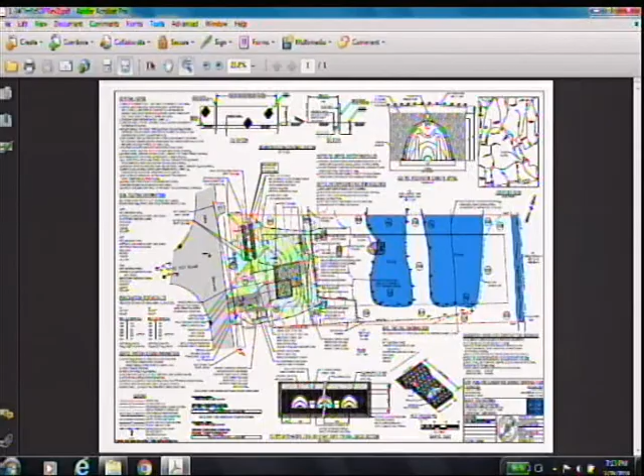So we have submitted revised plans and a letter dated March 20th, 2018, to Mr. Scott Schatzline in response to the review comments on his memo regarding the project here at 94 Elm Street. We also submitted a report from Eric Davison providing some additional information on the invasive species on the site, as well as several alternatives that he discussed in his memo regarding the invasive species.

So the changes we made to the plans and the additional information we provided included bringing the survey up to date so that it was T2 certified, putting the contours on a NAVD 88 datum. We added the limit of the floodplain to the site plan, which was based on the field topography. Property owners to the north have been added to the plan, and a note has been added to the plan indicating that the wetland flagging was located as part of the survey.

Let's see. We provided a response on the owner's request to maintain the current location of the existing gazebo, utility building, and deck overhanging the westerly pond. Those are all shown on the site plan. The gazebo and the little utility building are in this location here. And this is the existing deck that's overhanging the pond. If you want to call it the finished floor of that deck, it is above the floodplain elevation, which is approximately 409, this line right here.

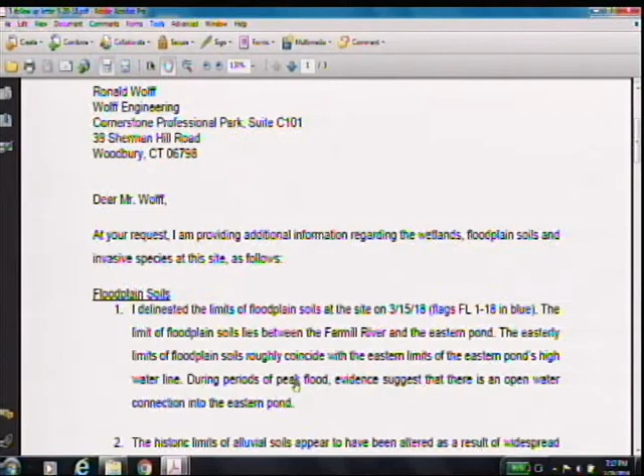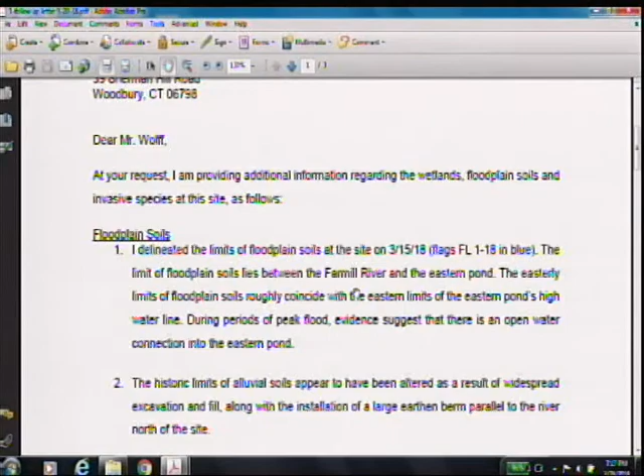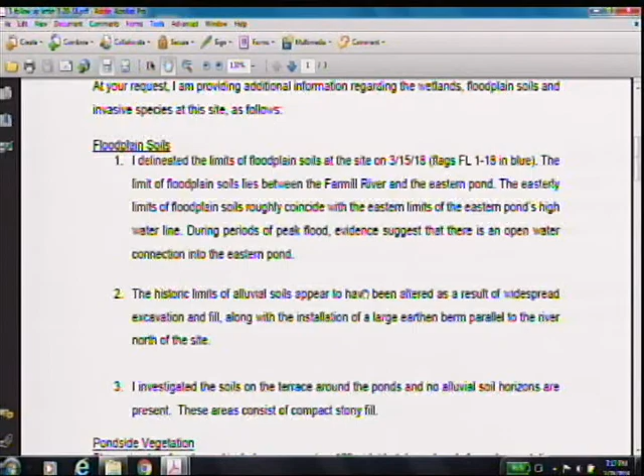Eric also delineated the floodplain soils, which was kind of difficult for him to do, but he did it by soil borings. He found the floodplain soils to be located more to the east, near the actual boundary of the river, but there was a lot of disturbance there, obviously, from the ponds.

Let's see, he discusses the vegetation along the ponds, the different species. Invasive plants, I think that was the item of concern to the commission. Invasive plants are not widespread on the site. The largest concentration totals approximately 1,500 square feet and is located along the northeast corner of the easterly pond near the Farmill River. See attached sketch. This area includes multiflora rose, Japanese knotweed, Japanese barberry, Asiatic bittersweet, and bush honeysuckle.

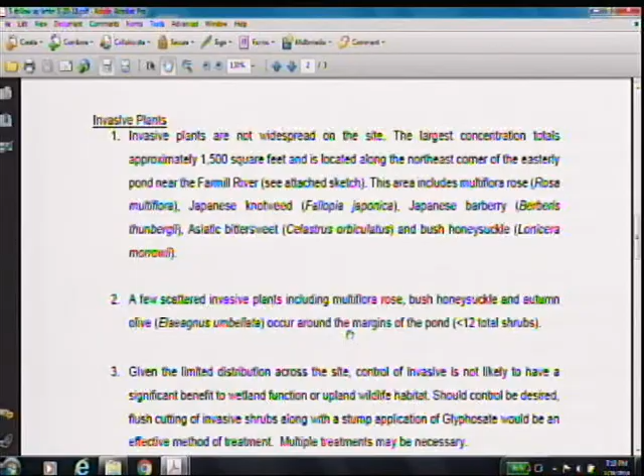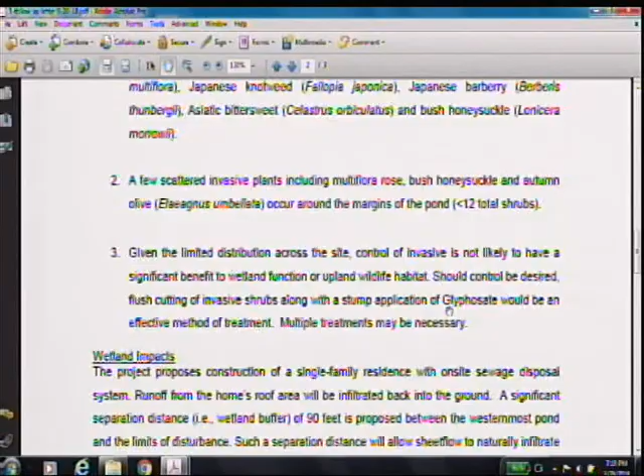A few scattered invasive plants, including multiflora rose, bush honeysuckle, and autumn olive, occur around the margins of the pond, about less than 12 total shrubs. Given the limited distribution across the site, control of invasives is not likely to have a significant benefit to wetland function or upland wildlife habitat. Should control be desired, flush cutting of invasive shrubs along with stump application of glyphosate would be an effective method of treatment. Multiple treatments may be necessary.

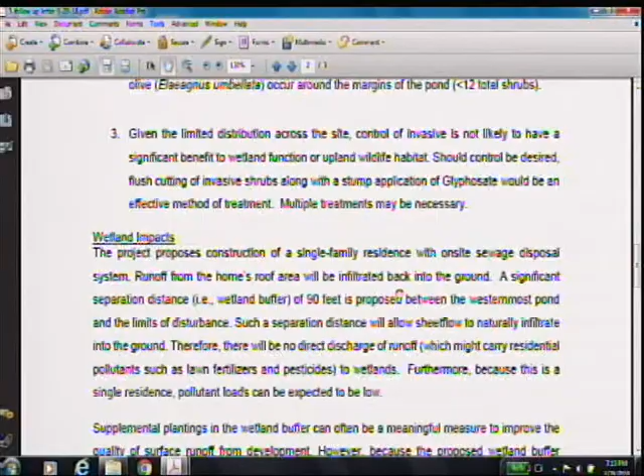So we kind of wanted to have a discussion with the commission about that, and that was also noted for discussion during the hearing on the updated memorandum from Mr. Schatzline. Regarding the wetland impacts, Eric writes: the project proposes construction of a single-family residence with an on-site sewage disposal system.

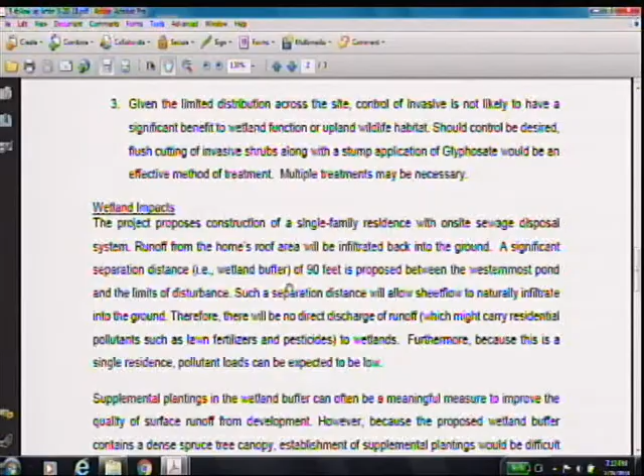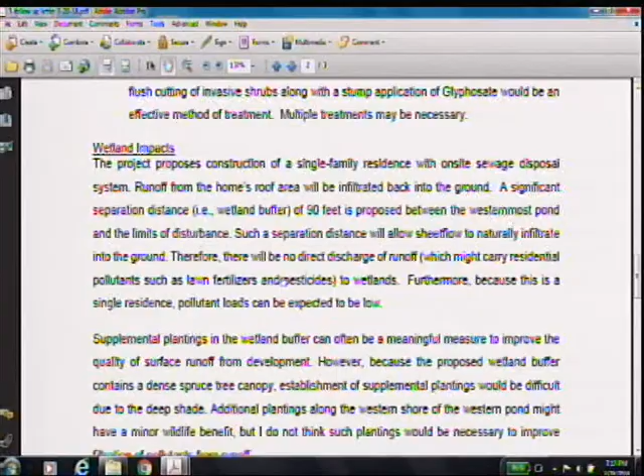Runoff from the home's roof area will be infiltrated back into the ground. A significant separation distance, i.e. wetland buffer of 90 feet, is proposed between the westernmost pond and the limits of disturbance. Such a separation distance will allow sheet flow to naturally infiltrate into the ground. Therefore, there will be no direct discharge of runoff, which might carry residential pollutants such as lawn fertilizers and pesticides to wetlands. Furthermore, because this is a single residence, pollutant loads can be expected to be low.

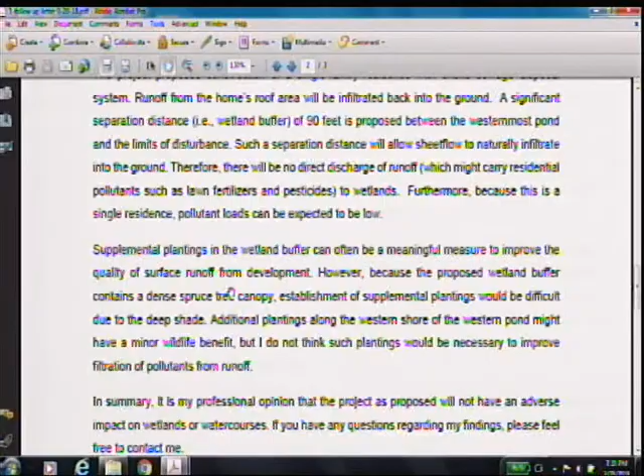Supplemental plantings in the wetland buffer can often be a meaningful measure to improve the quality of surface runoff from development. However, because the proposed wetland buffer contains a dense spruce tree canopy, establishment of supplemental plantings would be difficult due to the deep shade. Additional plantings along the western shore of the western pond might have a minor wildlife benefit, but I do not think such plantings would be necessary to improve filtration of pollutants from runoff.

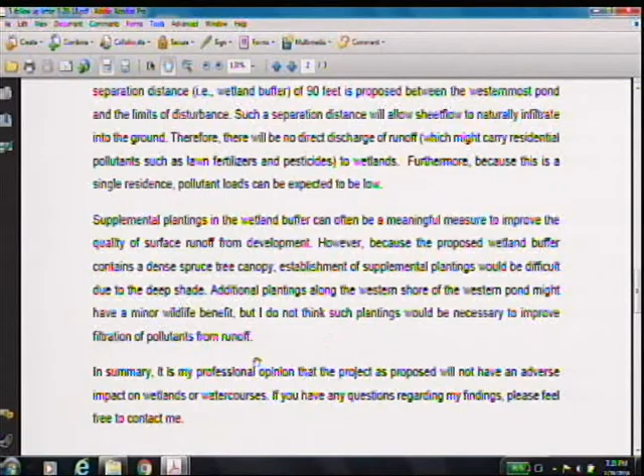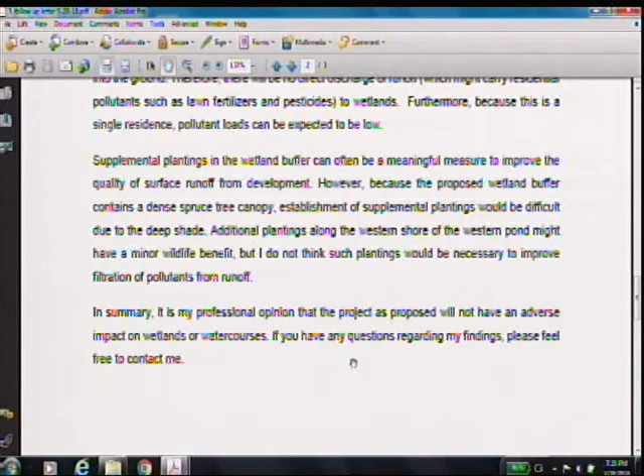In summary, it is my professional opinion that the project as proposed will not have an adverse impact on wetlands or watercourses. If you have any questions regarding my findings, please feel free to contact me. That's Eric Davis.

And he just has attached a sketch showing approximate locations of the invasive species with some notes. And that is all the updated information I have. I can answer any questions at this time.

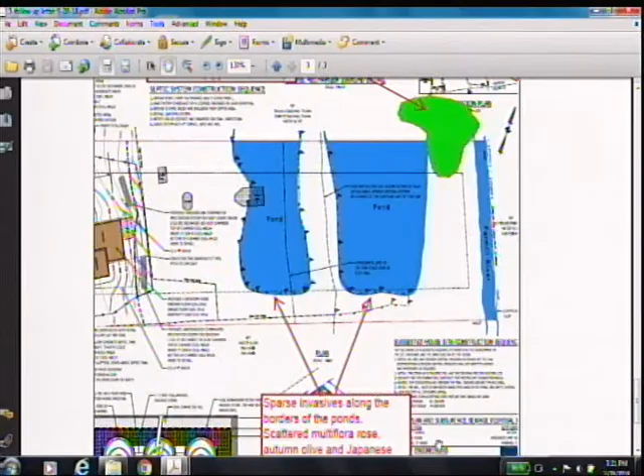Couple questions. Sure. So I noticed on the new plan you put apparently soil types, with the numbers, but there's no legend, there's no indication of what those are. At least I couldn't find them anywhere. I saw the soil boundary line, but I went through both this report and his delineation report, and there's no numbers associated with the soils.

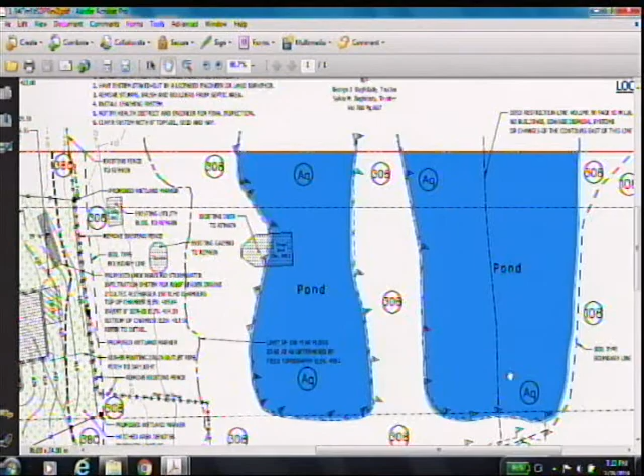Eric did provide an email for me, so I believe the 38C is the Hinckley type soils. The Aquents is the pond, so that's the AQ. They don't use AQ anymore, but it's a number, it's a number that they use. But I guess the critique is that in order for the rest of the commission to understand what these are and what description it is, having it on a legend and indicating what we're looking at would help, because we can't go back to any of the reports to understand what that is.

Okay, I understand what it is, but just a critique that we can't go back anywhere in any information to understand what that is. And in his report, he mentions floodplain soils, but he doesn't specifically talk about what soil it is. Is he just indicating that it's the Saco soil, or is he indicating something else? It's just a little general—he talks about alluvial soils, talks about floodplain soils, and if he's indicating that they're the same, it'd be good to have one consistent term used. Okay.

In terms of the invasives, one other thing we talked about last time was tree line, existing and proposed. The site's pretty forested right now, so it's a matter of what are you proposing, and where is that new tree line going to end?

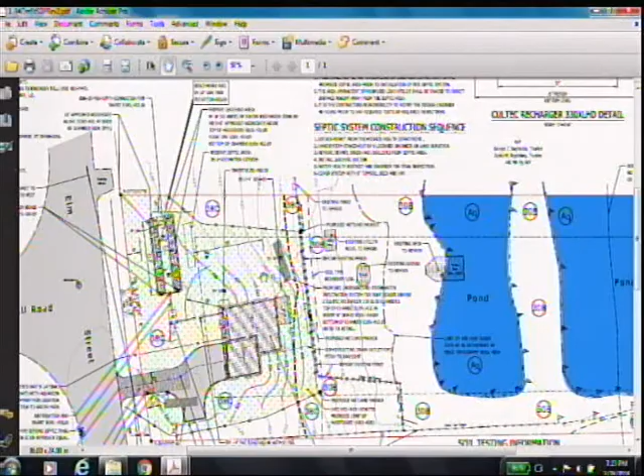I've shown that pretty clearly—this green area is our area of disturbance. That's going to be the proposed lawn, and the remaining vegetation everywhere outside of this clearing area is proposed to remain. It's pretty heavily wooded.

If I can get some clarification, because this was a little confusing for me too. When I went out there, this whole area in the back was previously cleared—it looked like an outing type place, with a gazebo, an outdoor kitchen, a three-sided shelter, and a deck. There are larger trees there, and it looked like it was cleared and maintained a bit better.

So when I look at this, I see a yard here that goes with the house, the lawn, and I understand the desire is to have the lawn go to here, which is good. But my question was exactly what do they intend to do here. Usually in locating these markers, what the commission does is put them at the limit of future maintenance and disturbance.

Whatever area these people are going to use for their yard, whether it be wood chips or green grass, now's the time to set those appropriately, because I'm assuming they'll want to go back there and use part of that to get to the deck and all that.

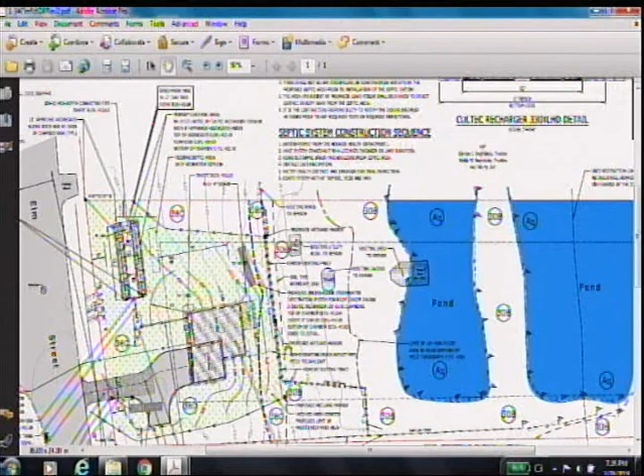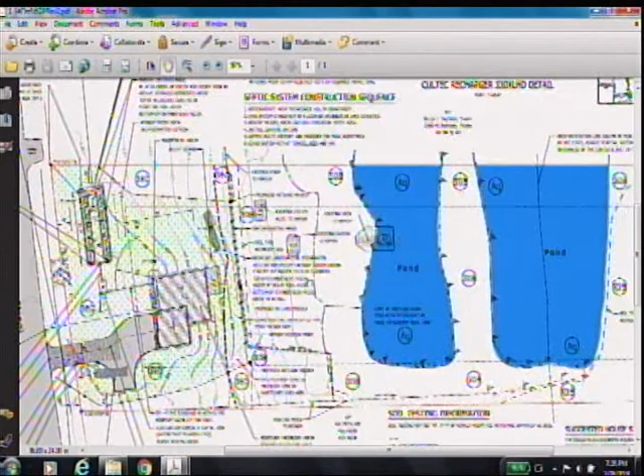It's been our experience at times that if you don't give a large enough yard to start with, new people who move in want a bigger yard, so they flatten everything and end up creating a violation because they're not aware they need our approval to do work in the upland review. Would it behoove you to make a little bit bigger yard so they wouldn't feel the need to expand what they have? He's very—

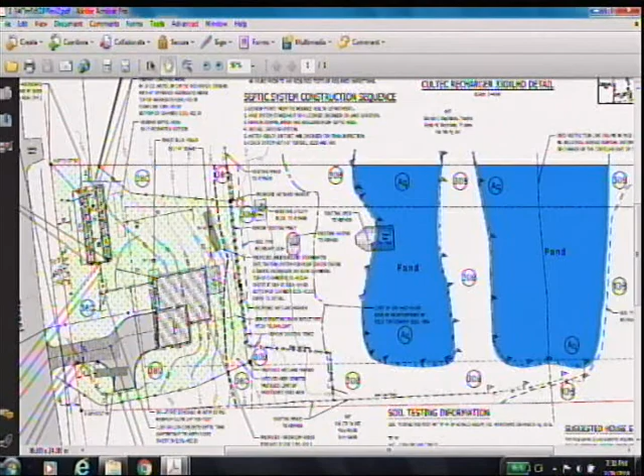I love the trees, they're gorgeous. Let me see - did I miss, are we happy with where the markers are in this? I know Scott had mentioned it. But if we're removing the fence, and now it's just the markers into the wooded, pine, whatever barren area there - is that the appropriate spot for those markers? Should that be at the grade change, do you think? Stupid question.

What do the markers say? Does it say wetland area, or regulated area? Yeah, they're kind of ambiguous because they're used for different things, and typically they've been put in at the limit of, within the upland review area, at the limit of what they're going to maintain.

Now, in this case, it's your choice. They could either go there, or I was thinking they could go along the other side of this thing, about 10 feet away from the pond here, and then coming in this fashion. We're open to whatever the commission suggests, essentially.

We could have a condition on it that kind of qualifies what this back area within the 100-foot upland review, in other words, what it should remain as unless they come in for an additional application. That's what I was thinking, but you could do it either way. I just wanted them to know that now's the time to discuss that. We're open to suggestions on that.

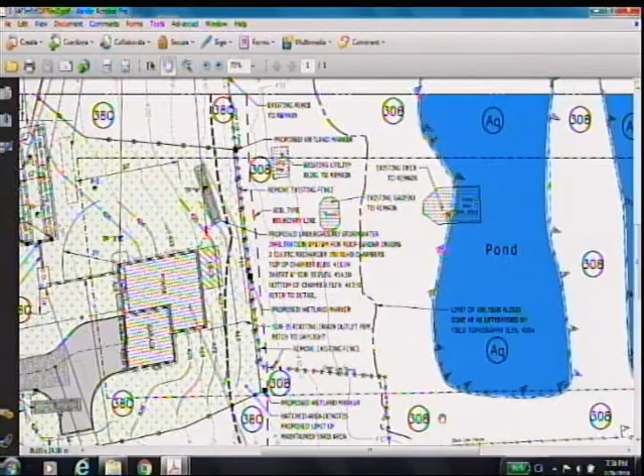But I do have a little bit more information on the soil types. Maybe I should have put that on the plan. I didn't know how much information to add, but Eric Davison just provided me that there were Saco-type soils along the river. Is that the number 108? That would be the number 108, yes. Okay. And then the ponds were the aquents. I'm not sure how you pronounce that. AQ were the two ponds.

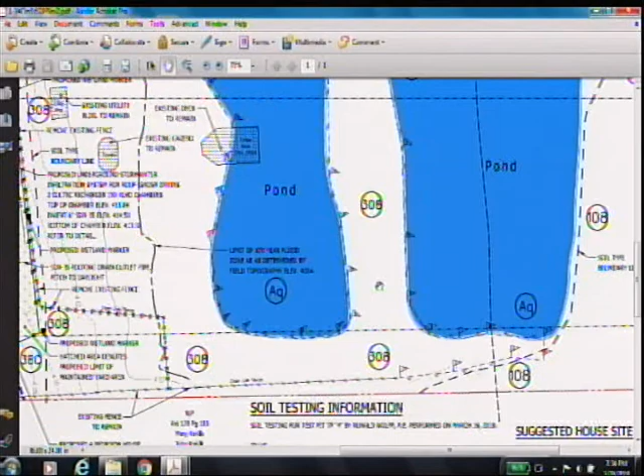Low slope east to the floodplain were udorthents. I believe is that 308? I used to see those as UD. So these numbers are kind of new to me, and I actually asked him for the letters. He told me they don't use the letters anymore, so they're using the numbers now. And then the Hinckley is the 38, and the C represents the slope on the land. If that helps at all.

As far as the markers go, they have their lawn area, but it's a pre-existing use area, and it almost makes sense maybe to do a 10-foot buffer off the edge of the pond. That's what I was thinking. I wouldn't even do that funnel, just do it off the edge of the pond. I think that makes a little bit more sense. And you could request that they put a note on the approved plan, and have it in a letter, that that area remain non-seeded, that it remain as is unless they come in for a future application. You put that qualification statement.

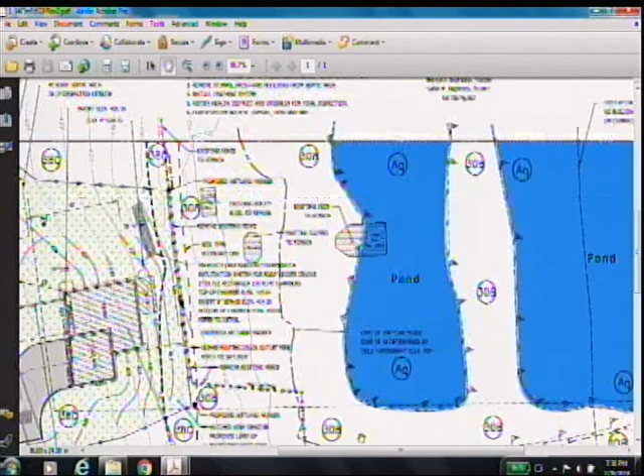So we could draw a straight line 10 feet off the westerlymost edge of the pond, put two markers on each property line, the north and south, so you have a straight demarcation. That might simplify things. And maybe one in the middle, or two at quarter points. I guess I don't understand: we don't want them, once they buy the house, to cut all the trees down, and if we put the markers 10 feet off the pond, I would think I'm set to do anything I want until 10 feet off the pond. Well, that's what I'm saying, have the qualification statement in the letter. Yeah, but they're not going to remember that. Who would remember, you don't even remember the marker in front of you.

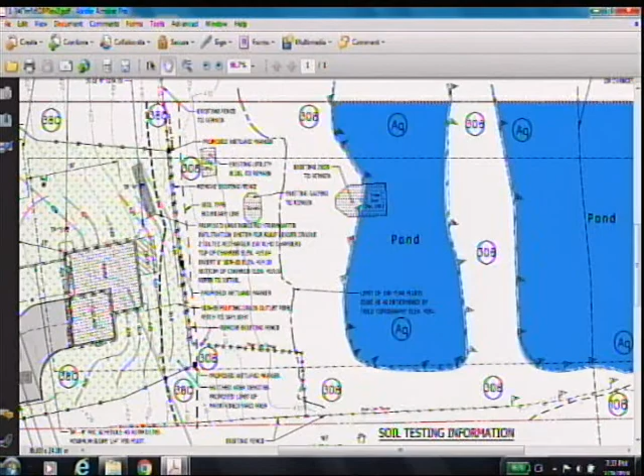Well, wouldn't it be a good idea to recommend that they stay out of the flood zone? Because that to me would be the demarcating line. The flood zone is more of a sensitive area, you don't want future owners to... I mean, flood zones can easily be utilized for passive uses. You still can use it even with the markers there, you just can't put structures there. Right, well, at least it alerts people that there is something special about that line, and with the conservation markers up there, it might say, okay, that's my drop dead line. That was just a suggestion.

Just leave it as proposed at this point. Yeah, I suggest leaving it as proposed then. That's where the limit is, that's where they're saying they won't disturb any of those trees at the edge of the developed areas. If they want to do more, they can come back. The marker doesn't mean you can't walk through the pine barren to get to the pond, it just means you can't cut the trees down.

Yeah, I'd rather leave it. It doesn't say you can't use the property. Good point. Yeah, that's a good point. I mean, in this case, the markers could just go where they're showing them, and then just leave it. If they were to do anything notably within that area, they'd have to come in for an application. Agreed. I guess that's why we left the wording kind of general. Well, it is in the setback area, right? Yeah, it is. Yep. Anything else from the commission?

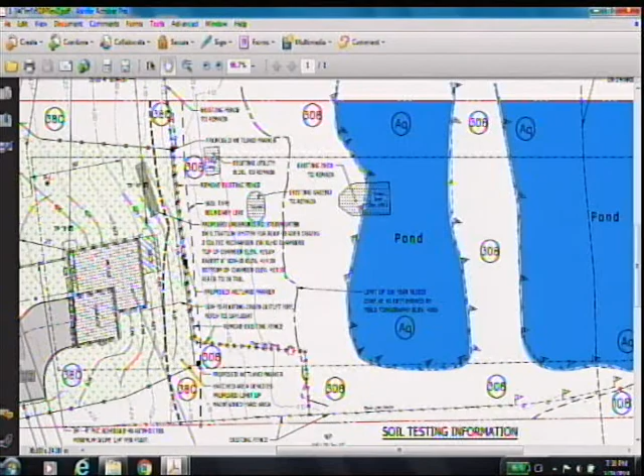The only other question I had was about the easement. Did we discover whether it is or is not an issue? The deed restriction? Well, what I did was I looked into it, and I mean, it clearly is an infraction against the deed restriction. The way I kind of put it to bed, because I really don't know what to do with it, it's so old, if you were to reverse it, what are you gonna do at this point?

But what I did was I went through the state statute, and if you read it carefully, it says that they have to provide the notice to the holder of the conservation easement if the proposed activity is within the easement area. And it's not. Now, what we've done, and I think we should continue to do, is if there is a conservation easement on the property, we go through the motions of that notice, and I haven't gotten anybody that has had an issue with that. But in this case, when I read it carefully, technically it doesn't say that, so I was just disregarding it.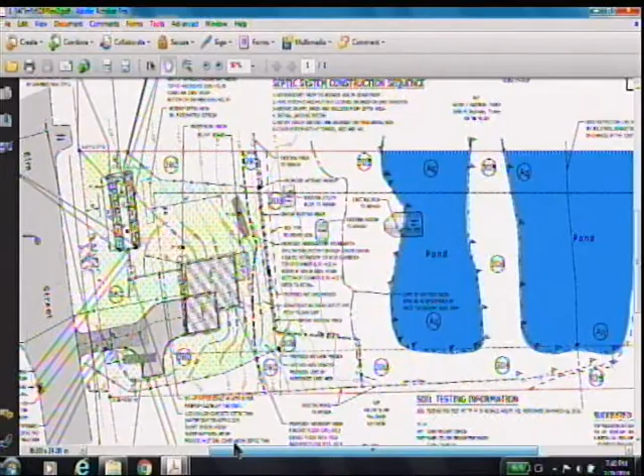Okay, all right. Similar to that is the floodplain issue and the fact that there's a deck there. When I went through the GIS program that we have, and went all the way back to 1984, there was evidence of that deck or some appendage out into the pond there, within a year and a half of when the floodplain regulations were adopted from FEMA. So again, without having real accurate information, I just let it be. Okay. It is a very solid deck, and it is above the floodplain elevation. I think that was probably a guess.

So what I did was I put a note of it in the file, addressing both as to how you rationalize that, and it is labeled as exhibit number 11. Okay, good. That's it, I have no more questions. Anything else from the commission? Okay, I'm assuming I've gotta do public comment, right?

Seeing as though this is a public hearing, I will open up this hearing to public comment. Is there anybody here that wants to speak in favor of this application? Seeing none. Anybody want to speak in opposition to this application? Anybody want to make a comment of a general nature on this application? Seeing none, I'm assuming we want to close the hearing, correct? Yeah. Okay, so we'll consider this hearing closed. Thank you very much. Appreciate your time.

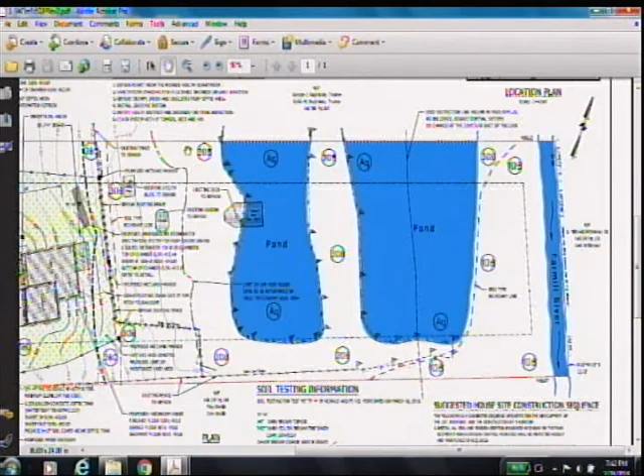Thank you. When do we hear the verdict? We will deliberate as soon as we're done with a few other things, and we'll get a letter out to you, right? Well, you typically would be voting the following meeting, remember? Two weeks. Just take a copy and forward it to the desk. Two weeks, is that our next meeting? Yeah. Is that a statute requirement? No, that's just typically how the commission does it, so that they have a draft from a legal standpoint. He composes the letter and we read it. You don't have to do that if it's a simple application, but we found that it's much more legally sound and cleaner. Gotcha. Thanks, Thomas.

Holding on to me over there, Lois, making me sweat it out. Thought I smelled sugar in here.

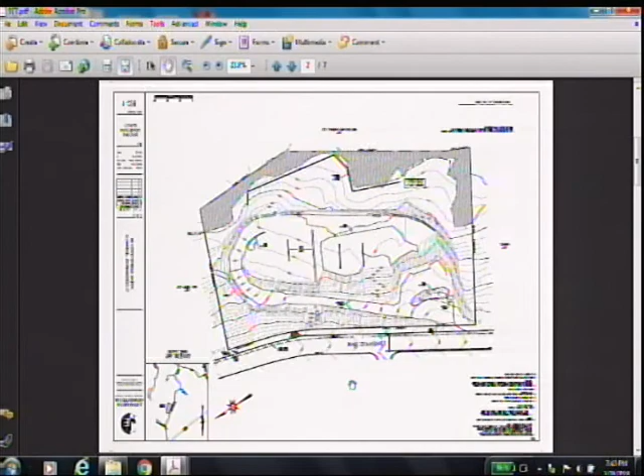Everybody ready to move on to the next item on our agenda? IWC 2018-01-R, 98 Enterprise Drive. Excuse me. Enterprise Drive LLC, Bartoli partner, Edwards engineer, site development to construct building and storage area and remediation of IWC 2017-02, continued from our last meeting on March the 14th.

Good evening. For the record, Larry Edwards, professional engineer, offices 27 Stepney Road in Easton. I basically have 10 items here that I picked up from the last public hearing that required responses. We provided revised plans to the town yesterday, and so I'm just going to go over those quickly. And Scott did send back a response letter to us yesterday or today with, I think, 2 or 3 other items that we didn't address, which I would hope they can make as conditions of any decision they make. But I'm just going to go through the ones here.

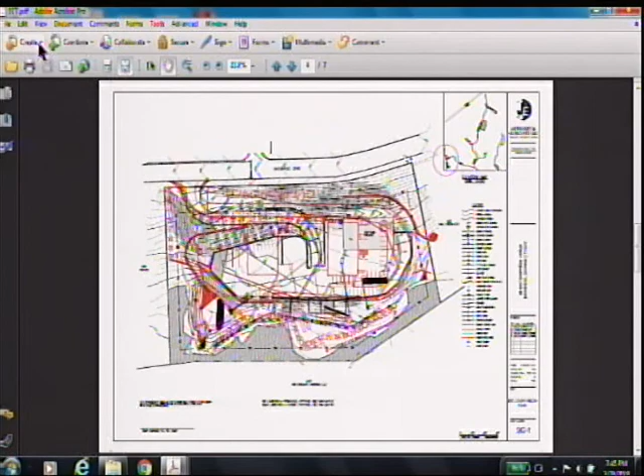There was an issue of, this is the comparison plan, and we had the before and after plantings locations in the same color, whereas they should have been red for the previous application. And one of Scott's comments was, and this plan doesn't show it, we didn't include this little bulk area, which was an existing previous application item that should have been red on this plan. So we do have one additional thing that we missed that was under Scott's comments. Now going to the site drawing.

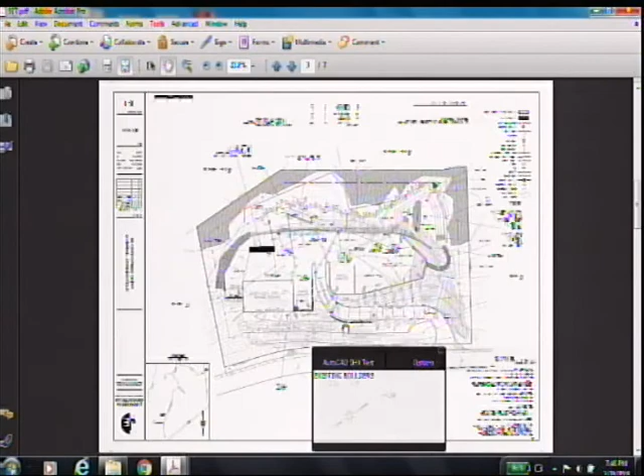You gotta get off the drawing, I think you gotta go over to some of the white area there. There you go. There we go. Just trying to get it rotated one more time. Just up beside that one.

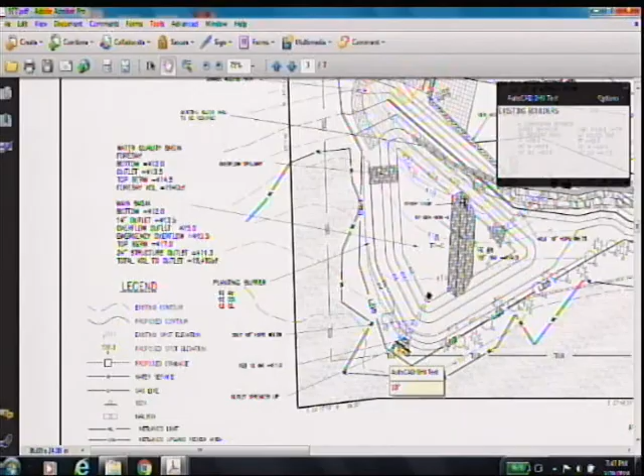Just going to go through the items. The first item that I have on my list, and these might not be in any specific order, there was a comment brought up about the size of the riprap outlet pad that we had. We revised that to, actually, as Scott had recommended, a spreader lip. We were able to reduce the length of that considerably, and a detail of that is provided in the plan. The existing stone walls, there was this stone wall that goes around along the edge of the wetlands, which we didn't show. We have included that on the plan.

The plantings, it was requested that we look at staggering the plantings, and we have done that here. Basically we kept the evergreens, which are, I believe in this case, spruces, as a constant line, but we staggered the intermittent plantings so that we get the effect of a staggering, but the delineation will still be a straight line with the evergreens. An access ramp to the basin, we proposed that. We've shown that here, and it's graded to a grade that we can get into the site and get into the basin.

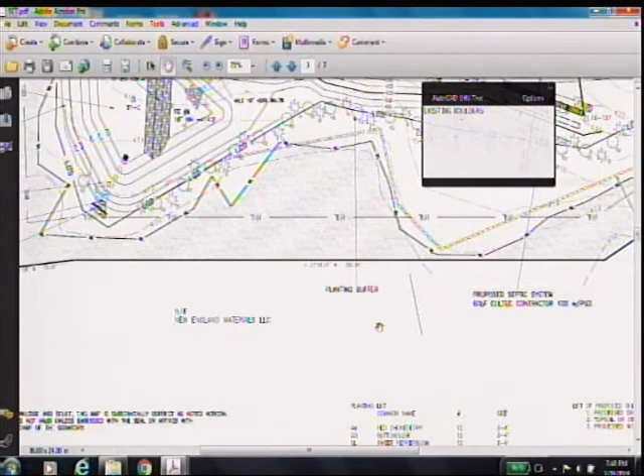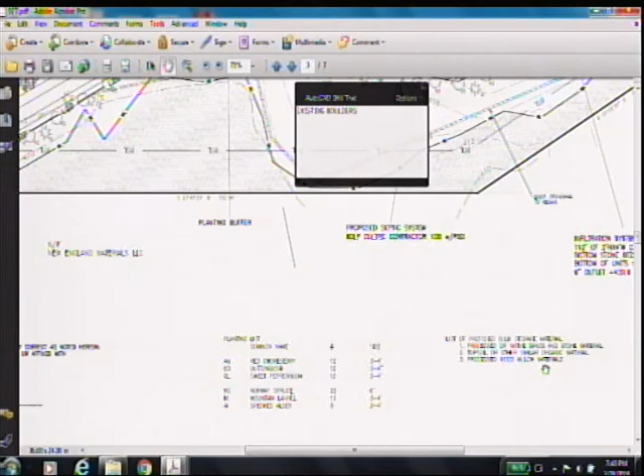We specified the materials for the basin, and those lists of bulk material types. Basically, we're calling processed or native sands and stone material, topsoil or other similar organic materials, or processed wood mulch materials. So those are the three types of materials. I know specifically they didn't want any asphalt milling products in there. So those are the materials that would be proposed to be used and stored in that area. We have included a particle separator in our stormwater drain, so that will be a last level of protection before it goes into the stormwater basin.

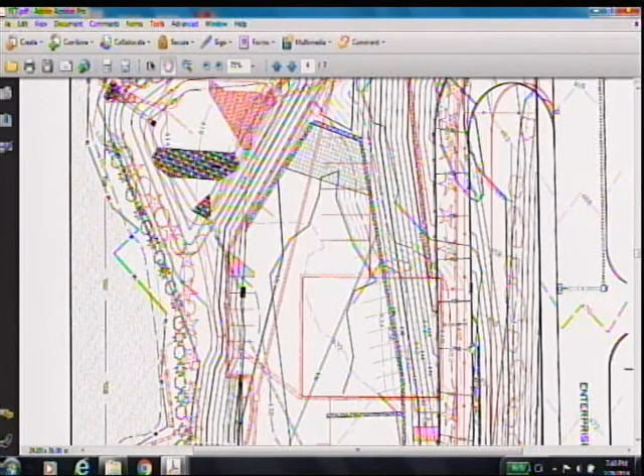The limits of disturbance, I don't want to go back to that other plan because I'm probably going in the wrong direction, but it does show the limits of disturbance, let's just see how it works. Okay, we do have the limits of disturbance of the two. One is in red and one is in the darker color. So we did provide that on the drawing. The forebay outlet, we moved it all the way up to the top of the forebay berm so that we maximize the length of travel between the forebay inlet and the outlet to the primary basin. Soils report, we have provided an updated report. We were able to get our soil scientist out there this week.

And on the pipe outlet, there was a comment from Scott's report on the levels of the pipe and the potential backwater flow disturbing the outlet to the basin. We have redesigned that, and we now have a 24-inch pipe instead of an 18-inch. We've lowered it down so that it's well below the outlet controls, and it will require 0 head, so one does not impact the other. In this plan, I changed it over here to a 24-inch outlet. This area right here still shows 18, so we do have to make that change. So that would be something for conditional approval. We did miss that.

And now going to Scott's response to our latest submission, which is what we have on the board here tonight. There were three or four items that he had. One, I indicated, was the bulk storage on the comparison plan is the wrong color. And the other two were both that we did not provide a revised stormwater management plan or copies of that. We did make the changes in the report, but we just did not provide a report.

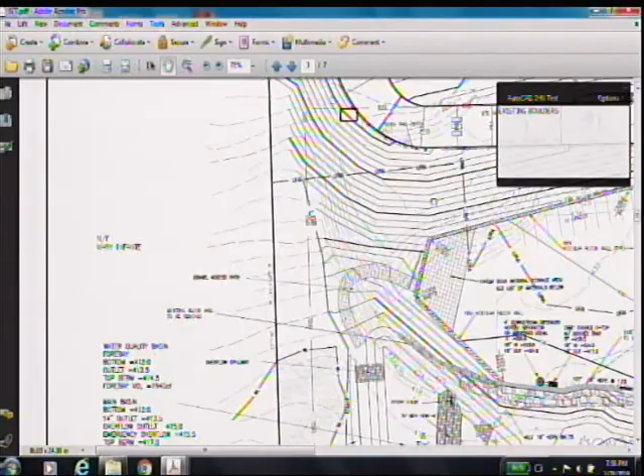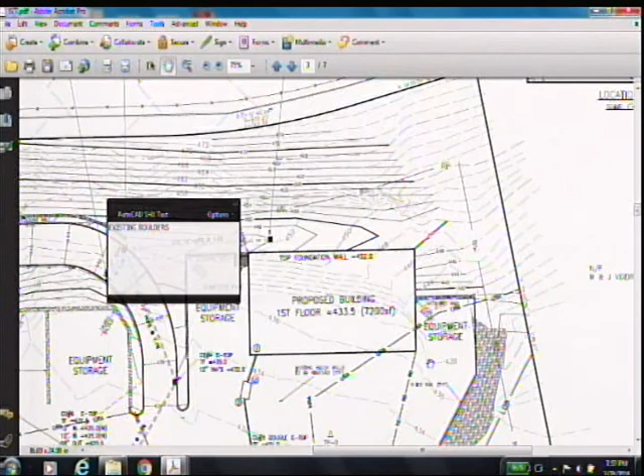I guess I am concerned with a pretty sizable space up front, and then you have another one that's east of the building, adjacent to the wetland. Just wondering if even silt fence or hay bale check dams along the slope, so that if we do have a storm event while you're trying to stabilize the soils, you're not getting rills turning into gullies on the slopes, and all that's left is a silt fence that could easily get blown out.

I wouldn't have a problem at the toe of the slopes. I think we could probably do that. Not up there, no. Oh, you're talking about here? I'm talking on the east side, yeah. These are all there, and they're all stone. That's stone, and so is that slope done? You're not doing anything there? This slope will be there, and this slope here will be there. So I wouldn't have an objection to running a silt fence along the toe of the slope. Yeah, so that you have a protection in addition. I would have no problem with that.

I obviously didn't include it because it's a relatively short distance; like in this area, where I have a double silt fence, it's only about 10 feet to the toe of that slope. And in this area, we're coming into the sediment or the water quality basin. So that's pretty well protected. But you're pretty close to the wetland on this side.

This area right here? It's probably there, right there in the center, the wetlands. Right at this point, yes, I agree. That's probably the steepest. But that's a relatively small area. And again, I have a double silt fence 10 feet away from the toe of the slope. So I would have no problem putting an additional silt fence along the toe of the slope. It's not a hard thing to do, and it would give it added protection. I can't disagree with you.

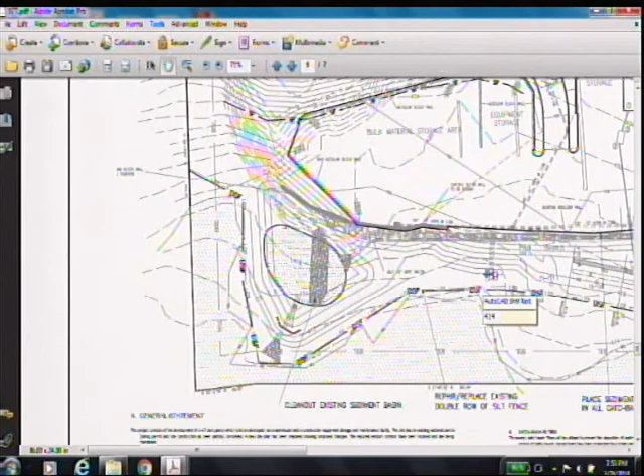Scott, did Mr. Edwards answer your question about stage storage calculation data? Not yet. That could be something he can verify. Typically I look for that for hydrologic purposes, but in this case, I was just trying to confirm his volume number for water quality volume in the plan. That's something I can confirm afterward, and it could be contingent on confirming that the volume he says is there is there, that's all. So I'm not worried about it.

Anything else from the commission? Anything else for the applicant before I open it up to public comment? Nope, I'm done. Okay, because this is a public hearing, I will open it up to public comment. Is there anybody here that would like to speak in support of this application? Anybody in opposition to this application? Any comments of a general nature to this application? Hearing none, we will go ahead and close.

Or do you want to see if he has any closing comments? I'm sorry, any closing remarks, sir? No, sir, I'm all set. Sorry, I'm supposed to ask you four more times. Is there anything else? Okay, so we'll officially close the hearing. Thank you very much.

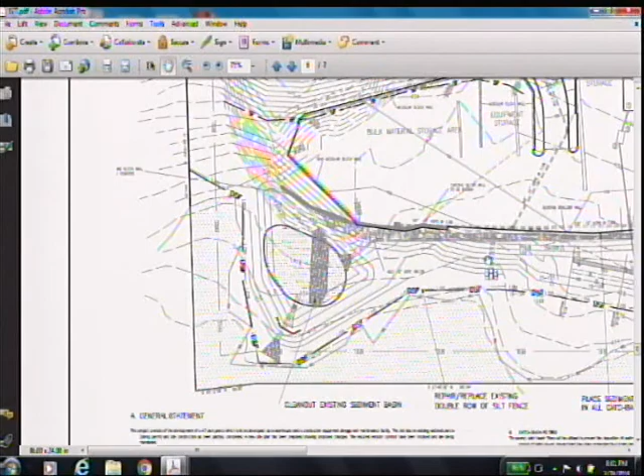All right, so the next item on our agenda is enforcement. Notice of violation discussion, IWV 2018-01, 17 Enterprise Drive.

J&S Industries LLC. We received an email from Attorney Dominic Thomas today stating he would not be able to attend the meeting tonight. He had a family emergency come up and couldn't make the meeting, and requested that be relayed to the commission. So did he say he could come to the next meeting? He didn't really say that in his email, but that's my understanding.

We've issued our notice of violation. We would have to send him another letter saying he'll be back on the agenda for the next meeting. Any other thoughts on the matter? No, okay, so I guess we'll go ahead and do that. Do I need a motion? No, I don't think we need to discuss that.

What's the date of our next meeting? Is it the 11th? Yes, it is, April 11th. Okey-dokey.

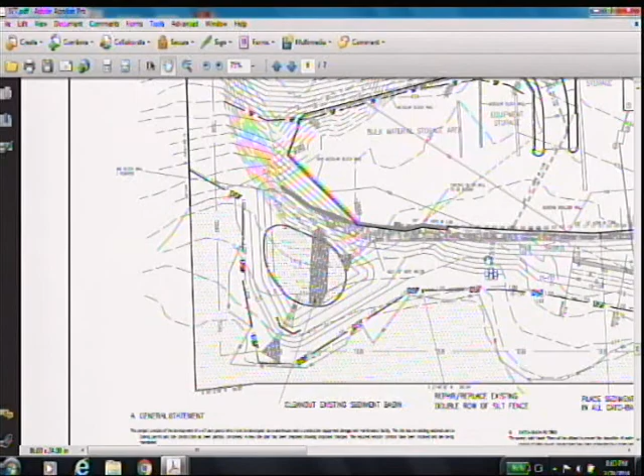Recall that they came before you with a proposal to put in the bin storage off the northeast corner of the building, and that also included the tanks on the southwest corner of the building. We received the application for that at the Planning and Zoning Commission, and noticed there was an additional outside fenced-in storage area, changes to their parking lot, off the southeast corner of the building, adjacent to the detention basin.

I notified the Planning and Zoning Department that that wasn't part of the application that came before you. I called the applicant and told them they need to submit that to the commission. Incidentally, that outside storage area, the fencing, it's there already—they installed it. This is in 8 parking spaces in their parking lot. They put in chain link fence with concrete footings, and there are pallets and containers and various things inside the storage area. So I notified them that they need to submit an application.